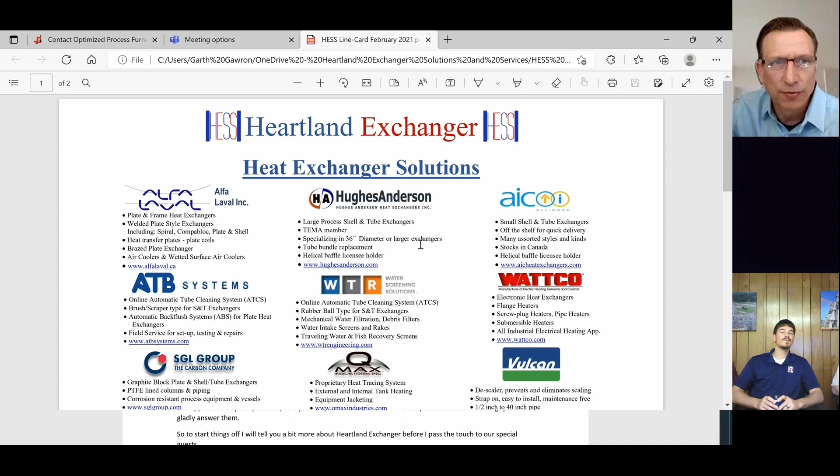These are the companies we work with as an agent rep company, to help us find solutions and services to the different applications. So how we know most of you all is with our Alfa Laval line. Alfa Laval is world known for their plate heat exchangers and their different styles of plate exchangers and their high efficiency, either in a spiral, Compabloc, plate and shell, or gasketed units.

And then for shell and tube companies, we've got Hughes Anderson out of Tulsa. Our smaller units, we use AIC out of Ontario. Wattco out of Quebec is our electronic heat exchangers. SGL Carbon out of Cleveland is our graphite exchangers. And then with heat transfer...

We're always getting into solutions to make sure we can get long run times. So we've got companies like ATB Systems that have a fabulous backwashing valve to reverse flow and keep your heat exchangers clean. WTR has a ball cleaning system that is fabulous for keeping a heat exchanger clean while it's in service - these balls are cleaning your system. Also, ATB has an online system too with brushes, so they do that reverse flowing valve with brushes, keeping a heat exchanger clean on the tube side in service with brushes or balls.

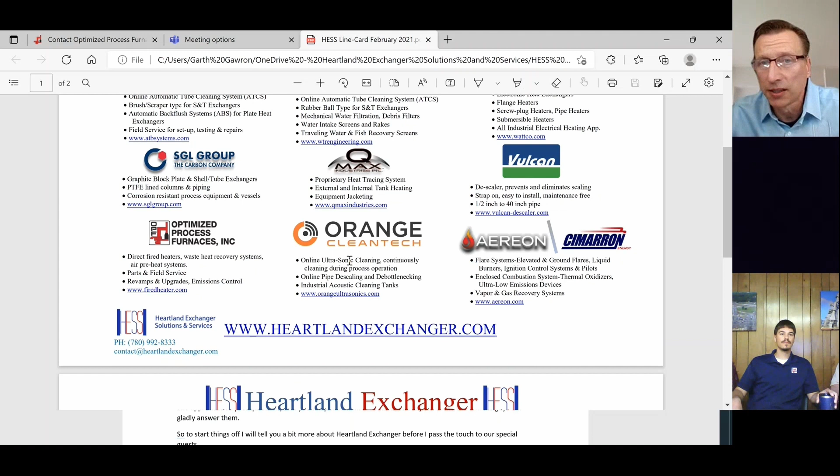We're very strong in chemical cleaning, it's one of our specialties. Orange Cleantech here is online ultrasonic cleaning, really good technology that we're bringing into Alberta. We've got a couple really good installations where we're using ultrasonics to keep your heat exchanger clean. So I think you guys understand where we're coming from - we've got a lot of good options and ideas to put in the right heat exchanger, and once the right heat exchanger's in, we're making sure it gets the longest optimal runtime.

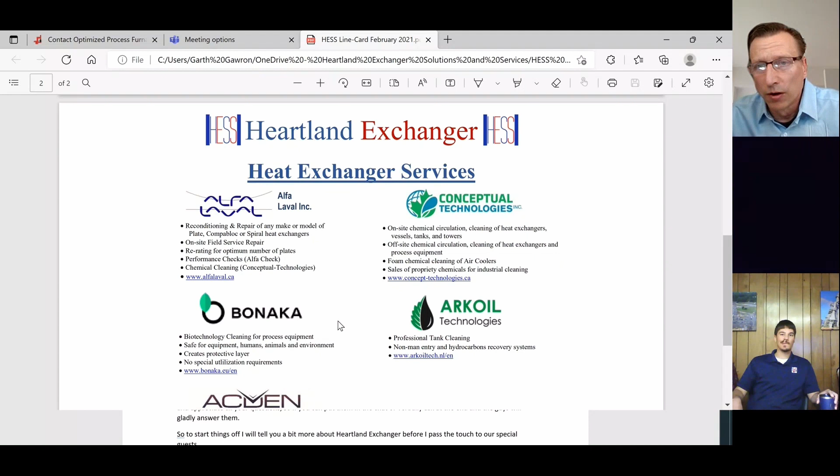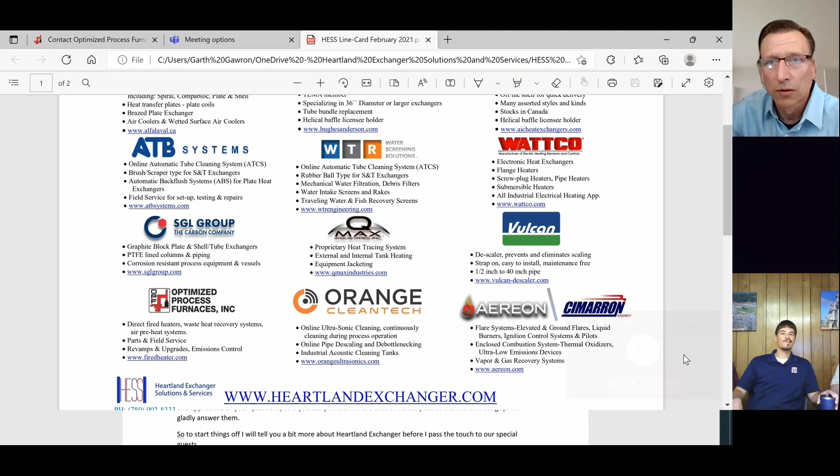And then obviously furnaces are part of the heat transfer business of the processes out here. So we were so grateful and thankful to be able to meet up with Rob Phillips and his company out of Chanute, Kansas. And so that's where we're at here today. So I'm going to stop sharing here now.

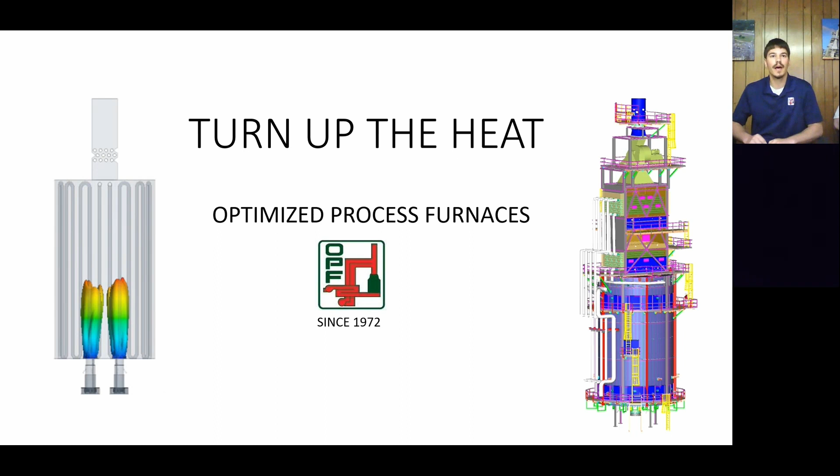We're going to start off here with our direct fired process heaters, the most broad terminology for these. We're going to blow through a couple quick applications between refineries and gas plants, talk about some heater arrangements, cover both process design, and let John talk about mechanical design and fabrication. There's a lot of back and forth on API 560, which is the standard for fired heaters, so we'll very briefly discuss that.

In the midstream gas plant area, we also offer midstream style package heaters. And last but not least, waste heat recovery units, which we've had a lot of activity with up in your area here the past year or two especially.

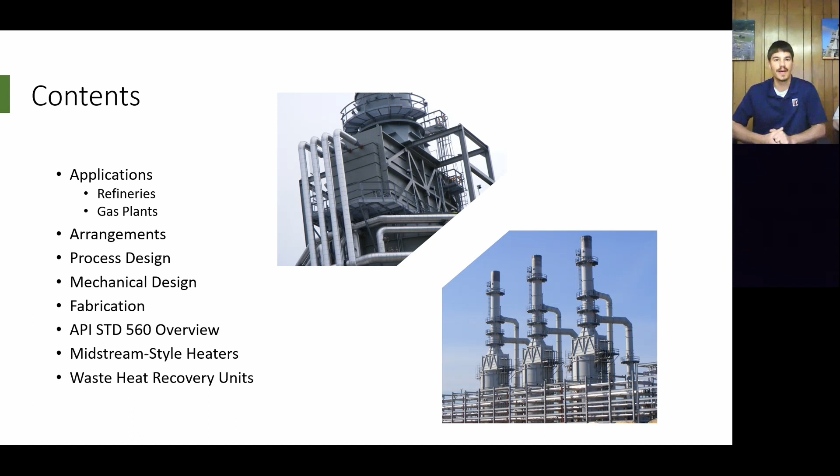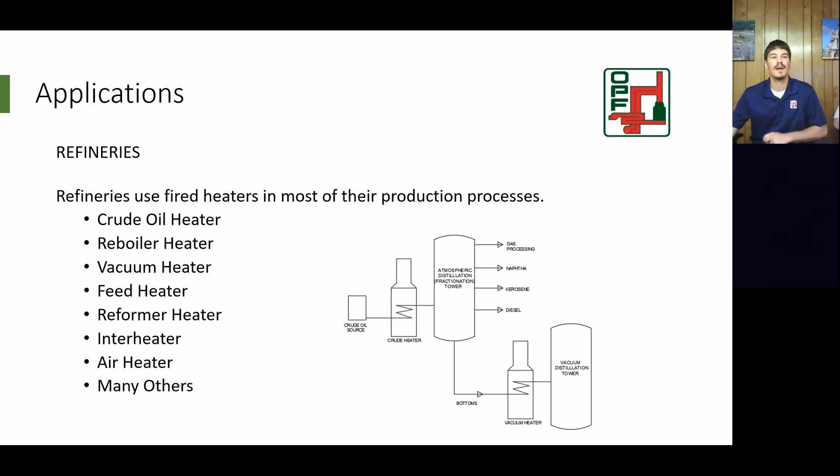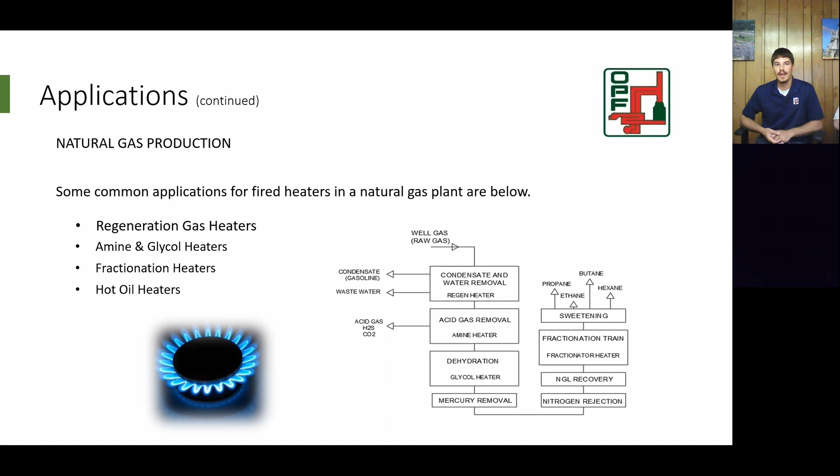As I'm talking, John and Sam may chime in too, so you don't have to listen to my monotone voice. As Eric said before, our core business starting out was direct fired heaters. We'll emphasize towards the end here, we have a lot of application for waste heat recovery units, and we'd like to have an opportunity to look at any heat transfer opportunity related to a process. We're seeing a lot more these days projects where people are trying to capture that waste heat instead of letting it go to the atmosphere and be lost, trying to improve efficiencies a little bit, especially off turbines and things like that, putting a waste heat recovery unit on the back end to capture that exhaust gas and then preheat either a process fluid or a hot oil.

So on the fired heaters, there's several different arrangements. As a lot of you know, the heat source is the burners, and there's a lot of different layouts for the burners. The most common is just having floor mounted vertical firing burners. You see on the left with the coil on the outside of the flame, and then endwall fired burners, so you're firing on the ends, and then sidewall fire. These are pretty self-explanatory terms here, but the pictures are good representations of the arrangements.

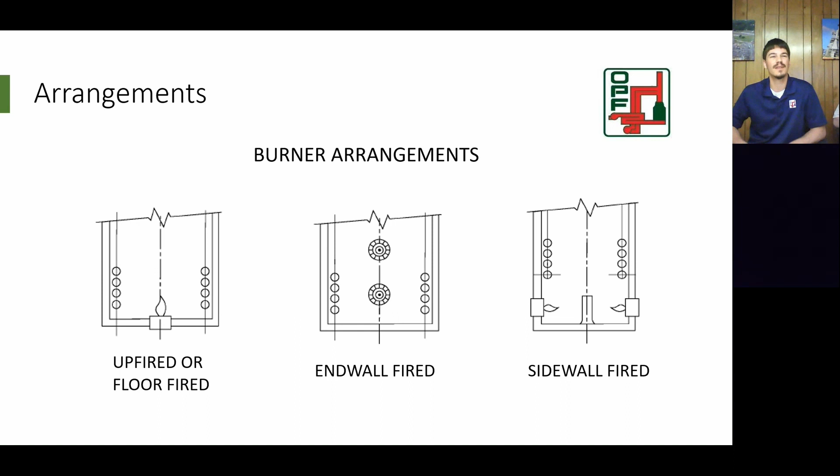Then for just the heater coil, there's vertical cylindrical heaters where you have the serpentine coil that you see there. There's helical wound coils, and then there's also serpentine horizontal coils you see in the lower right hand. And on some processes, they require arbor coil, which is a U-shaped coil, a lot of passes, and there's a large manifold that ties all of the passes together.

You usually see those with large process requirements, extremely high flow rates, very low pressure drops, high temperature requirements. And that's one of the things I think that Eric and Sam focus on a lot, is working with you when you have heat transfer needs, trying to determine what's the most economical arrangement for you that fits your process, and also what's the most economical in terms of cost and site footprint. We like to give you multiple options and work through those during the inquiry stage to make sure that you're getting a piece of equipment that is going to meet all of your needs for an extended period of time.

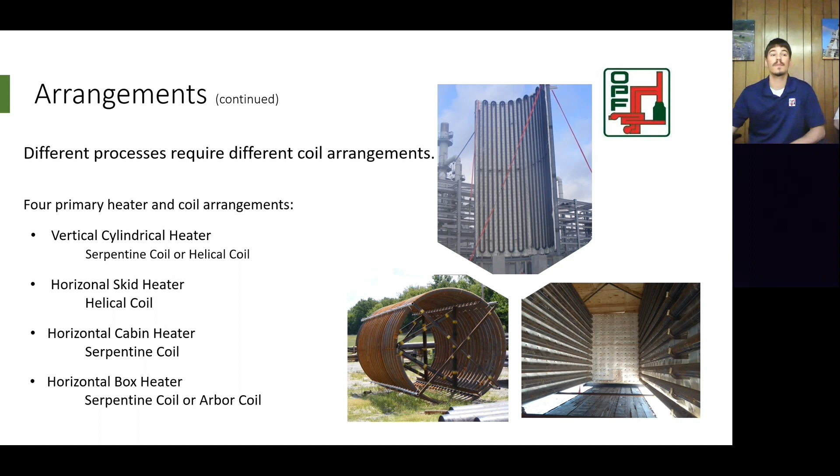I'll let Sam chime in here especially, but there are some things to consider with your arrangements. As John said, some types of heaters or arrangements are more economical than others. Some processes require or lean towards a typical arrangement of both the burners and the coil. And then, as John mentioned, the footprint of the heaters varies with what type of heater we're looking at.

And that choice really is highly situational. It really depends on your plot space availability, the ambient temperatures, ambient pressures, the process itself that you're trying to work with, the temperatures you're working with, everything that's involved there can change what you really want to try and cram that into. And what's going to give you, we like to think that we're pretty good at getting you the best bang for the buck, and sometimes that'll change.

Now, there are a lot of processes that don't really care what they get crammed into. A hot oil heater, a regen gas heater, for the most part, you can put it in a VC, a vertical cylindrical, you can put it in a horizontal cabin, you can put it in a box heater, or just about anything else, really. But some of the things that really do help think about what you're trying to do with a heater...

With a VC, the nice thing about those is that they're inherently symmetrical. So it's perfect circles, so your heat's radiated again in a perfect circle, and you can match burners to pass configurations, and that makes it easy to maintain even heat across the entire surface. And it also means that you've just got that simple can, a convection box maybe on top, and a tall stack.

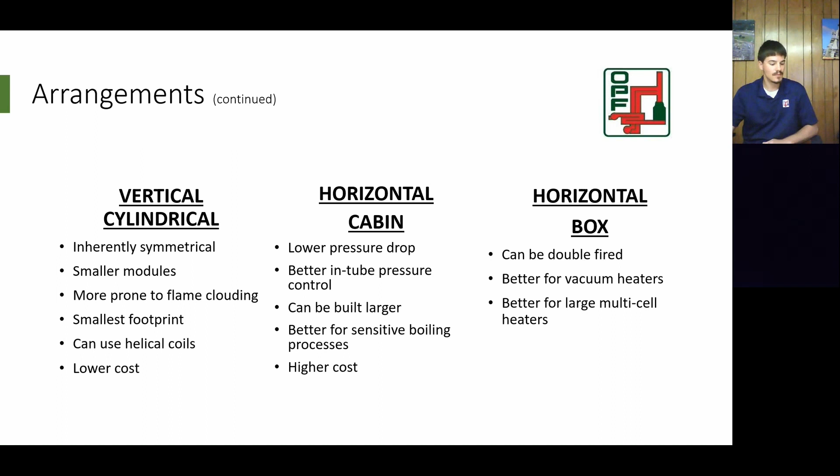And you've got your box heaters that are much better at hanging a center set of coils with burners on either side. That lets you really lower the peak flux rates and lets you keep your process from overheating, which is important. You don't want it breaking down when it's not supposed to.

Our go-to design often will be just a VC to start with. It's the most common heater you get. It's a little less expensive, easy to work with and design, and it fits most of the applications you're going to want to work with.

We see a lot of VC heaters in reformers, hot oil heaters, and NHT feed heaters. Once you start working with vacuum heaters, we tend to want a box or cabin where you can control the precise pressure drop by elevation as you move up or down the sidewalls. Crude heaters and reboilers, you see a lot of those in cabins.

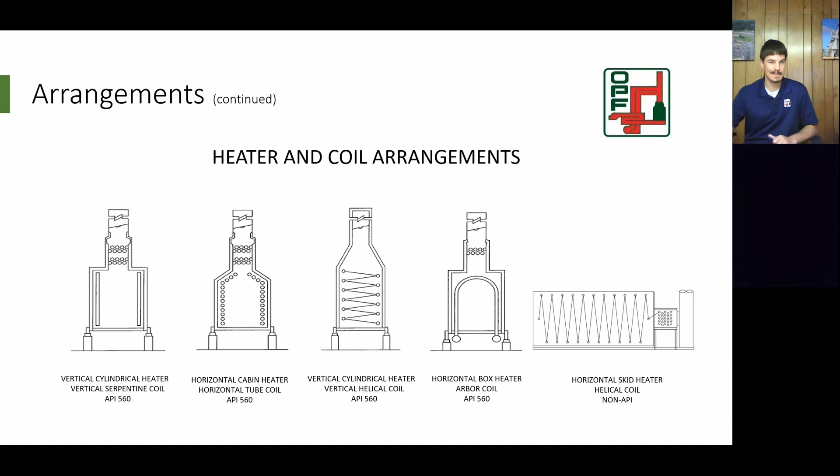As you get very large duty requirements, we've built everywhere from less than 1 million BTU heaters—we kind of chuckle about making hot water heaters—up to several hundred million BTU. Box heaters are really good because you can put multiple cells together to get several hundred million BTU, and you have much better control of your combustion and your process.

Let's see here. Is that other stuff going to pop up? No, you should click on it and it'll pop up. Okay, sorry about that.

So the different components—it's kind of hard to depict it all in one slide because of the different heater arrangements—but here we're talking about a vertical cylindrical VC heater with floor fired burners. The burners are providing the heat for the process. They radiate the heat, and the tubes are vertical around the circumference of the heater.

The flue gas flows up into the convection section where there's bare tubes for the bottom 2 or 3 rows, absorbing some of that radiant heat, then switching to convective heat transfer. Above the shock tubes, there's fin tubes—that is purely convective heat transfer.

The process typically enters at the top of the convection section and exits the radiant section, so it's a counter-current flow for heat transfer.

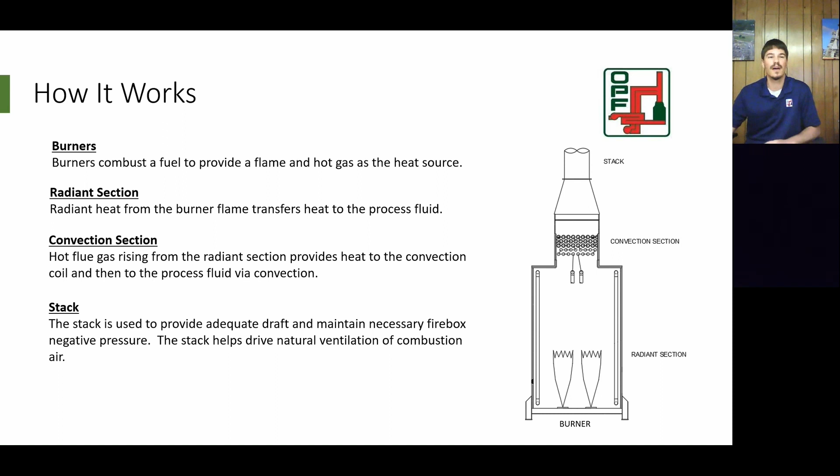Another way to differentiate between different processes for overall heater design is forced draft versus natural draft. Historically, probably most have been just natural draft, where you have a large stack on top which provides that natural draft to make up the pressure drop across the convection bank, and maintains negative pressure in the firebox so the burners are able to operate natural draft.

Lately there's been a lot of interest in forced draft. With forced draft, you don't need as tall a stack because all of the air side pressure is provided by usually a grade-mounted fan pushing air to the burners. At the same time, we typically design the stack to still maintain a negative pressure in the firebox, but all the air going to the burner is pushed by a fan.

With small packaged heaters, you'll see some positive pressure applications. Usually we try to maintain a negative pressure in the entire heater so you don't have hot gases escaping, but it's not absolutely necessary. When you're really trying to get a simple economical unit, we'll move over to a packaged forced draft unit with a little positive pressure, usually about half an inch.

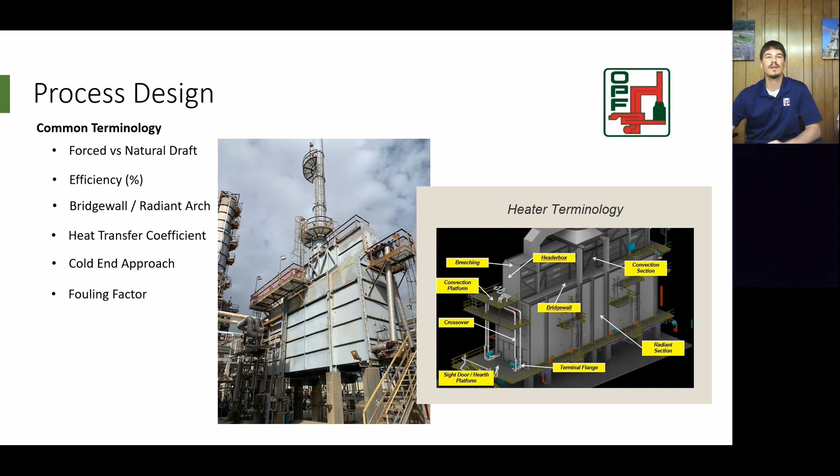I get in trouble because I forget how many clicks there are.

So we've talked about the burner firing rate, that's the heat release. Lately for emissions, the floor firing density is a hot topic. So the burner floor, where the burners are mounted, you divide the total heat firing rate by the floor area to get your volumetric heat release, or your floor firing density. Lately, burner vendors have been pushing for more area on the floor just to help with the natural flue gas recirculation coming down the walls and then towards the burners. That helps reduce the NOx generation with that mixing. So floor firing density is definitely something we're looking at on current heaters. API 560 requirements have bumped up that area requirement as well.

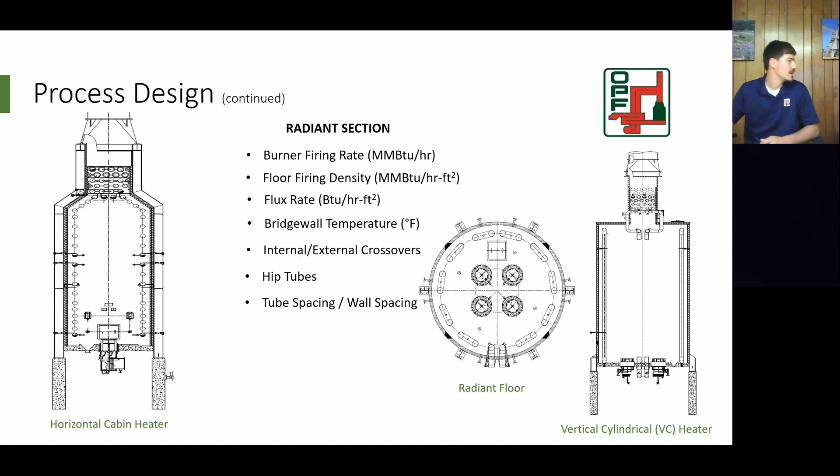I was just going to say, I think especially with ultra low NOx applications, as Eric stated, the burner manufacturers like to see good mixing. And with that recirculation down the back wall, that's one of the things they're really trying to focus on.

And then for the convection section, some common terminology here. We talked about cold end approach, and countercurrent flow. So the flue gas is flowing up vertically through the convection section, and the process inlet is at the top of the convection, flowing down for that countercurrent flow. The effective tube length is just the tube length inside of the convection section. On fired heaters, the convection tubes penetrate through the end tube sheets, and that's where the return bends are welded on. So some of the pipe length sticks out, but the effective tube length is the area of the tubes inside the convection section absorbing all that heat transfer.

Corbels are on the sidewalls, so another thing to talk about, the tubes in the convection section, the rows in the convection section are staggered, so they're offset each row to help the flue gas properly flow up through the convection section and avoid channeling. The corbels are there because with a staggered configuration for your tubes, you don't want these open areas on the side where the tubes are offset to channel anything, and then the corbels just block the flue gas flow.

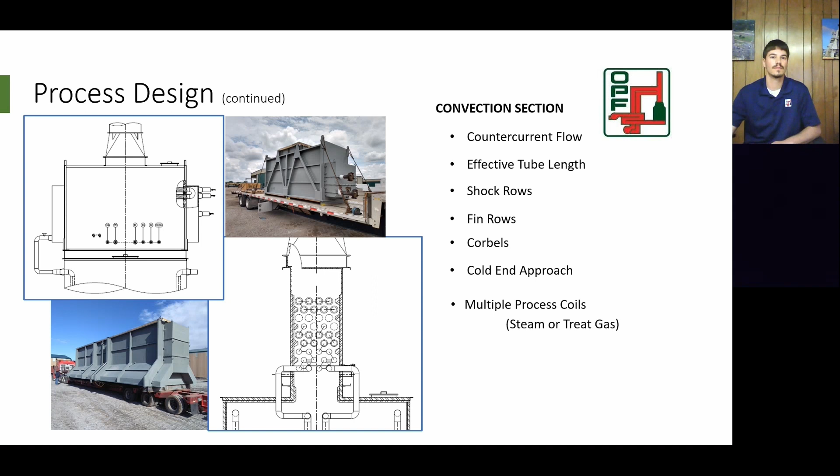As John talked about there, and as this picture shows, there's a main process at the bottom of the convection section, but we also have the capability of putting in an extra row or two if your plant needs some steam generation or boiler feed water through there, or treated gas. Small processes like that you just need to pick up, usually not a lot of heat, 1 to 5 million at most. Usually you want to keep it as a smaller function of how much total heat you're getting, because you want to be able to actually nail the process that you're targeting. We can do multiple processes up there, steam generation, boiler feed water, treat gas, and interlace if we need to, but we always want to make sure you've got enough heat to get you where you want to be.

So on specifically the process design, I'll briefly go over that. When we receive inquiry from you guys, especially for a two-phase or a vaporizing process, there's some things we really need, and one of those is a vaporizing grid, whether it's D86 curves or TBP curves.

This link here, hopefully if I open it... never mind, I'm not sure it's actually going to open with this software. With that, that's okay.

We just need, like we show here, some properties. Usually we need some physical property grids that show the property curves, whether it be conductivity, enthalpy, densities, and then the vaporization from the process inlet to outlet.

And then on the right, the data sheets that we provide with every single quote, they'll show your flux rate in the radiant section, and then the pressure drop. Probably should have talked about the fouling factor as well.

It's worth mentioning these data sheets are on API 560, and when you're not sure what you need to give us when specifying a heater, really filling out this front page and maybe the next page, the first 2 to 3 pages, as much as you can. The first page is really the most important. If you can give us how much duty you need and a little bit about what's going into it, we can figure out the rest, and we can talk you through whatever else you need to do.

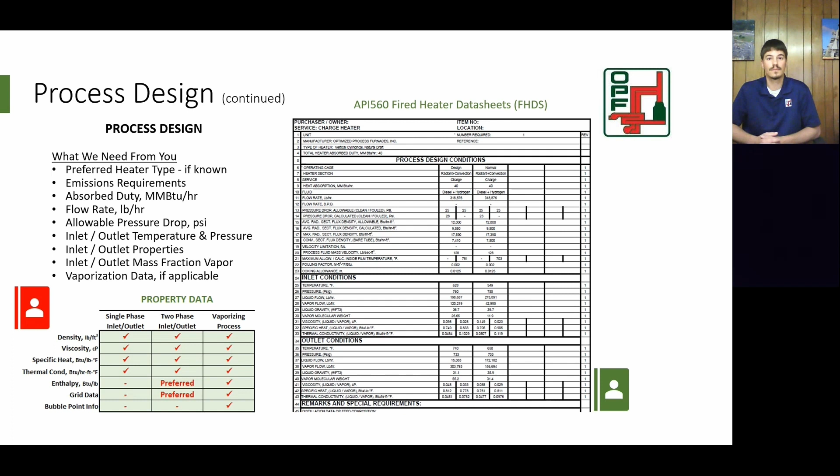We're going to talk a little bit now in this section. We'll be brief here, talking about normal operation overview, specifically first about furnace efficiency. Sam has a few slides here. Once we've gone through those, we'll talk a little bit about adjustments that can be made to your fired heater to improve efficiency, reduce your fuel consumption, those types of things, and then finally talk a little bit about some emissions considerations there. So I'll turn it over to Sam here.

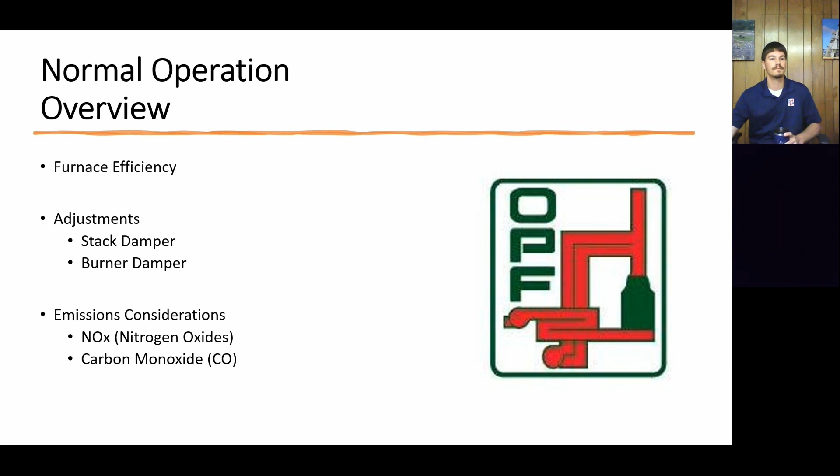And of course, you want your furnace to run well. You don't want to use any more fuel than you absolutely need to. So you find that efficiency is related to how much you're firing, how much heat you're taking up. And by definition, it's how much heat's actually getting into your process. If it's not getting where you want it to go, then it's not any use to you and it's wasted heat. So as you increase some things and decrease others, then you get higher and lower efficiencies.

One of the primary things you can control once you have an established unit on site is how you handle your air control. The more air you put into your furnace, the more air you have to heat up, the more fuel it takes to get it hot. And two-thirds of your heat is taken up, ballpark, in the radiant section. Heat transfer is a 4th order relationship to temperature, so the hotter it is, every degree matters. The hotter you can get it, the better you're going to transfer your heat in that radiant section.

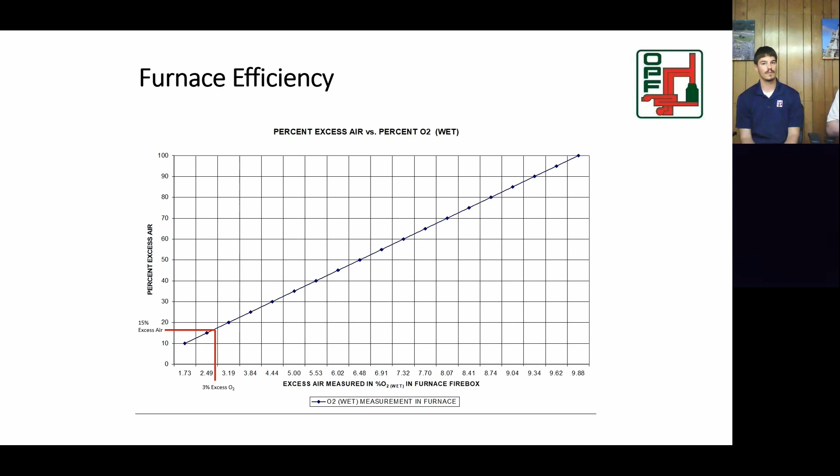The relationship here is more about thermal efficiency, as Sam stated, the more air you're heating that's going out the top of the stack and not being consumed by your process, the less efficient your heater is.

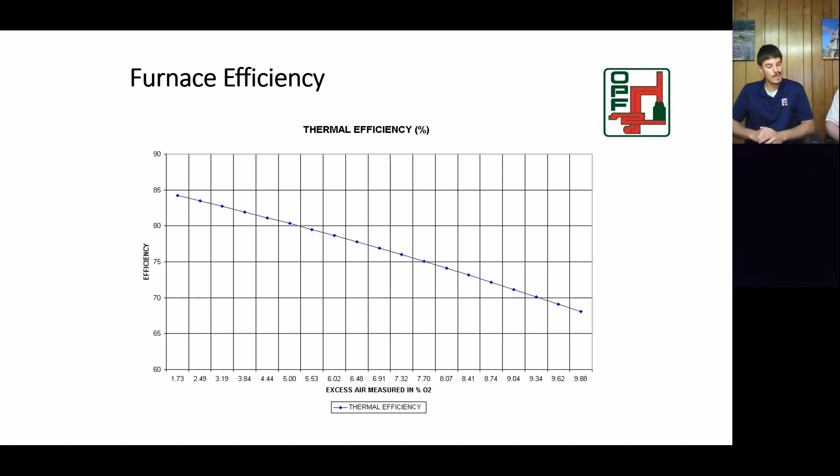So what you find is that if you've got an oxygen analyzer on your stack, just a few extra percent of oxygen in your stack can readily knock off a couple of percent of efficiency as well. That's all heat you're not keeping in your process. Fuel you have to burn, fuel you have to handle, and if you're buying it, it's all dollars.

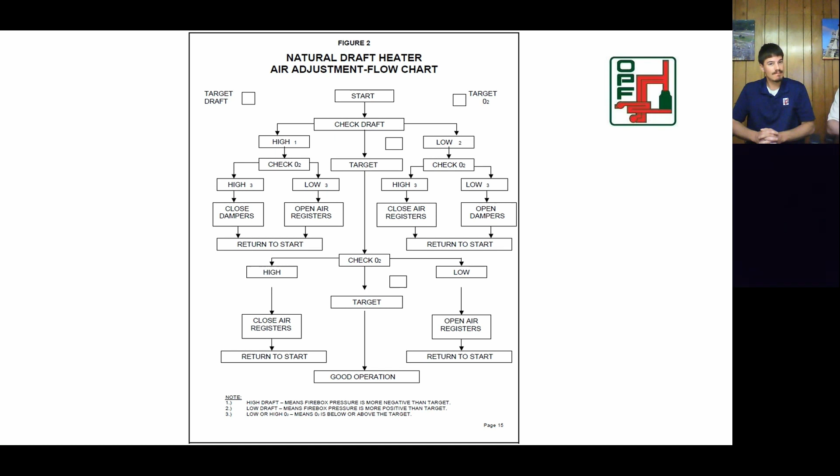So we're just looking here at a flow chart for how to adjust a natural draft heater. It really boils down to you want to lead with turning down your fuel or turning up your air. Being safe, you always want to have less fuel than air — you never want to get to a point where you have too much fuel in a firebox and not enough air to burn it. So if you're having trouble with a furnace, you turn down the fuel, let it stabilize, and you follow this flow chart, checking your oxygen and making an adjustment as you go.

You'll also note that as you get too much oxygen in, your flames will change color. It depends on exactly what's in your fuel, but with natural gas, generally you want a yellow flame. If you've got too much air, you're going to see some blue flame, a lot like a Bunsen burner.

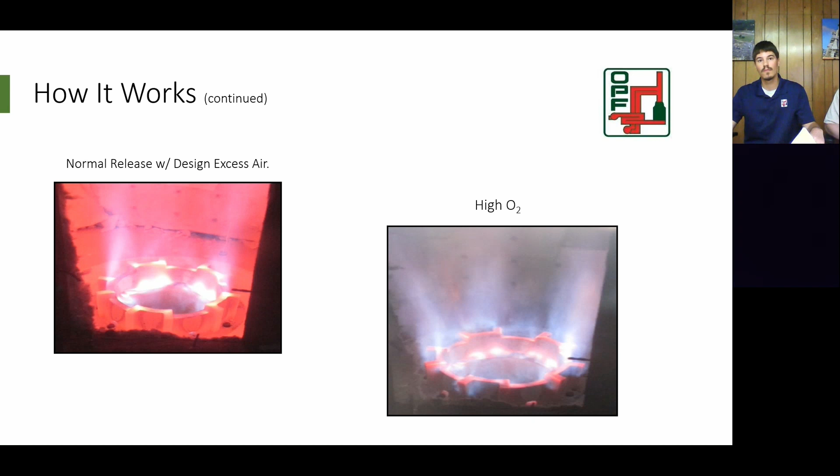Moving on to the most important part, which I think is the mechanical design. I'm sure Sam and Eric will disagree, but we talked a little bit primarily on the mechanical side. We're concerned with these primary factors here.

One is the design temperature and pressure, which meets your requirements in the field, which in turn dictate what our tube wall thickness is, depending on the specification we're using. Typically ASME or API are the two primary governing design codes we use for determining wall thicknesses.

Additionally, when we move more into the mechanical side, we'll look at stack design. Typically for most direct fired heaters, and even some waste heat recovery units, we'll have a self-supported stack. Our structural engineers look at stack vibration, the tube support system associated with the heater, and the insulation system. We work with the process group to determine the best type of internal insulation required for the job. We're also looking at access in terms of ladders and platforms to get to your instruments and controls attached to the heater.

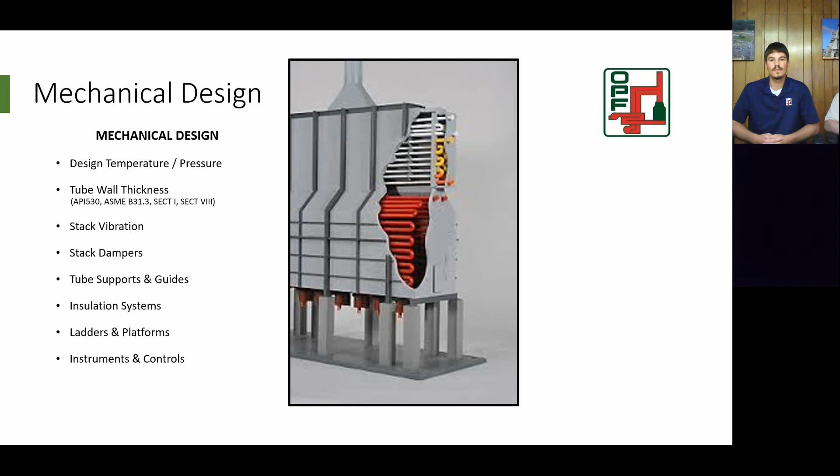So those are just a few of the things mechanically that we look at throughout the life of the project. And here on the mechanical side, we just talked briefly about the design temperatures and pressures and the tube wall thickness.

Many of you probably know Barlow's formula. That's the primary formula used by ASME and API to calculate tube wall thicknesses based on the allowable stresses at whatever your design temperature and pressures are. We can back into a required tube wall thickness, whether that's a standard wall, Schedule 40, or a heavier wall, depending on your process application.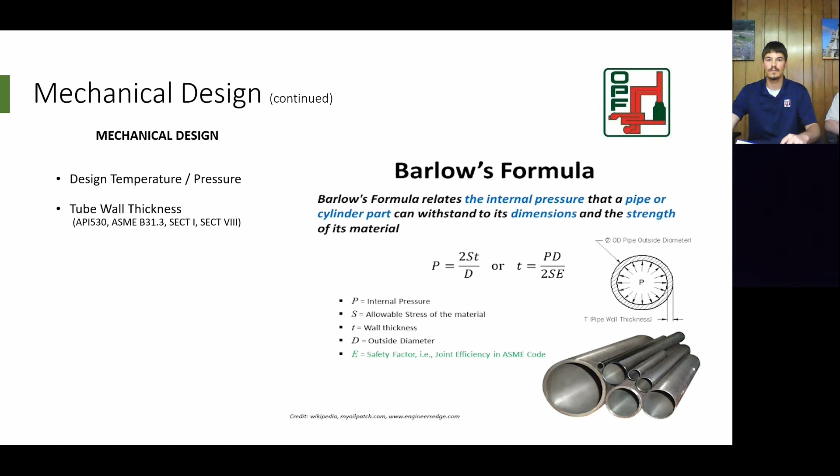Again, looking at the stack, that's one of the main focuses. The last thing you want at your facility is a stack that's moving in the wind. It gives you an uncomfortable feeling that something bad is potentially about to happen. The last thing you want is a customer walking in the door saying, hey, I just saw your stack moving out front. So typically for any application in Canada, we'll utilize the Canadian Building Code.

We can also use ASCE 7. The most current code right now, I believe, is 716. In conjunction with that, ASME also has a steel stack design recommendation called STS-1.

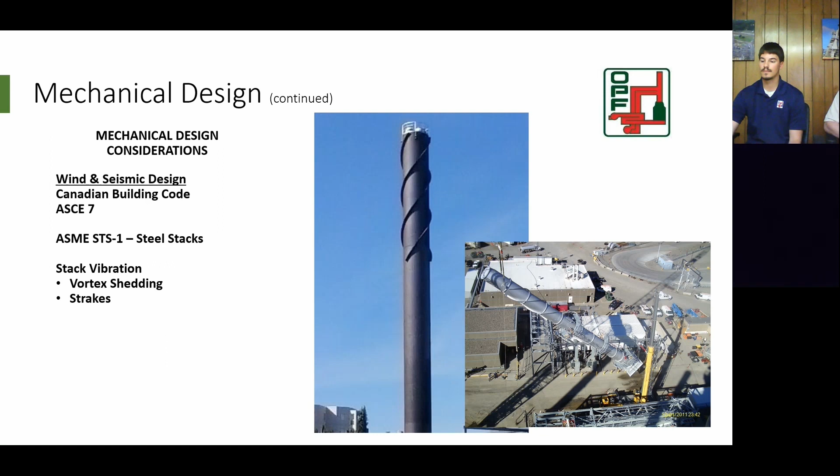So we use that as well to design the stacks, making sure we don't have any vortex shedding issues, which typically involves strakes attached to the top of the stack. Many of you, in your facilities or as you drive by them, may notice these spiral wound strakes around the top of flares or unsupported stacks that help reduce the effects of vortex shedding.

As Sam stated before, with the flow chart we have for determining good efficiency for your heater, if we're adjusting pressure inside the stack or airflow, the two primary tools at our disposal are stack dampers and burner air registers. The stack damper is predominantly used to adjust pressure inside the heater, and the air registers on the burners are used to adjust oxygen.

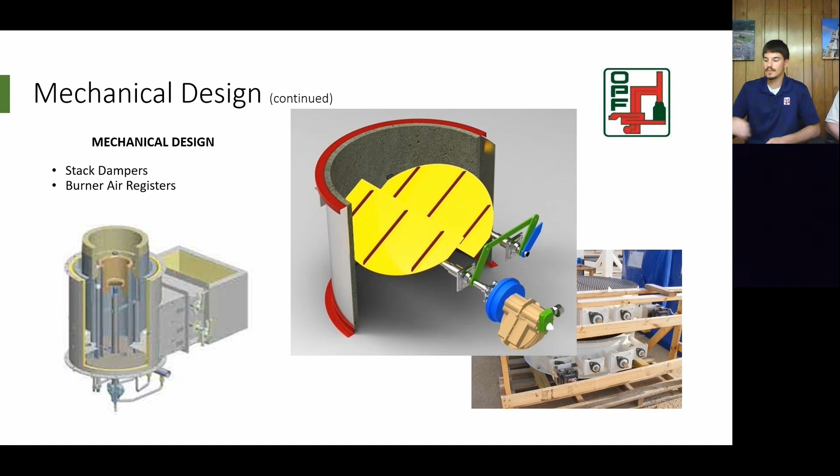Mechanically, I'm going to turn this back over to Sam and let him talk a little bit about supports.

As we design these furnaces, one of the things we try to do to save you money is account for particular stress points where individual tubes have tension or compression, requiring additional hangers. So we design around those values.

API has specific requirements, ASME has specific requirements, and the Canadian building codes and requirements are very similar, often just referencing ASME. So that's one of the things you'll find as we limit various sizes. We try not to go taller or wider or longer than needed to accommodate those, but we can build them however big we need to.

Tubes generally, horizontal tubes such as the convection section or horizontal cabin heaters — I'm sure many of you are familiar with the general rule of 35 ODs for unsupported pipe length. For vertical tubes, I think API limits it to 70 foot straight tube length; it used to be 60. I believe they also have an unsupported length for vertical tubes, but OPF uses our own internal calculations for those stresses on vertical tube supports.

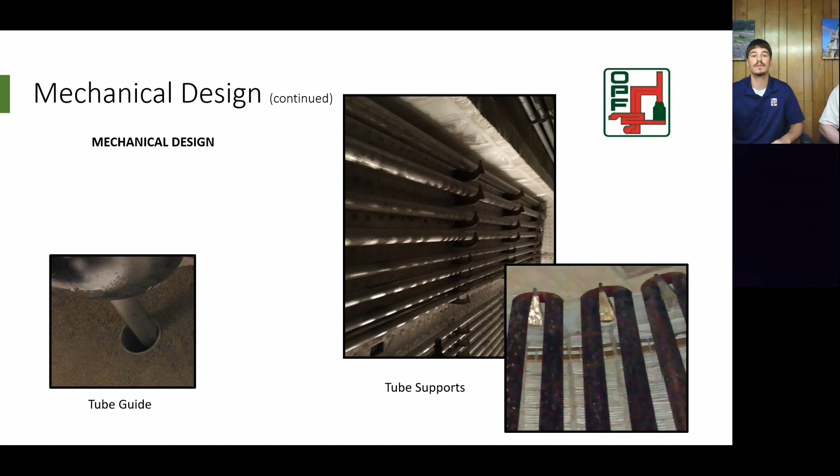All of our heaters are internally lined. John may talk about that in a minute as well, but API 560 specifies an external casing temperature of 180 degrees Fahrenheit. So typically the radiant section is insulated with ceramic fiber blanket, convection section as well.

Occasionally we come across some customers who want insulating castable refractory, at least in the convection section. It's more common if anyone up there is firing oil, and if they have soot blowers in the convection section, you

want castable to avoid the soot blowers knocking off the insulation. The radiant floor and around the burners is typically 6 to 8 or 10 inches of castable refractory, and then there's also a layer of fire brick to protect from the extreme temperatures down there around the burners.

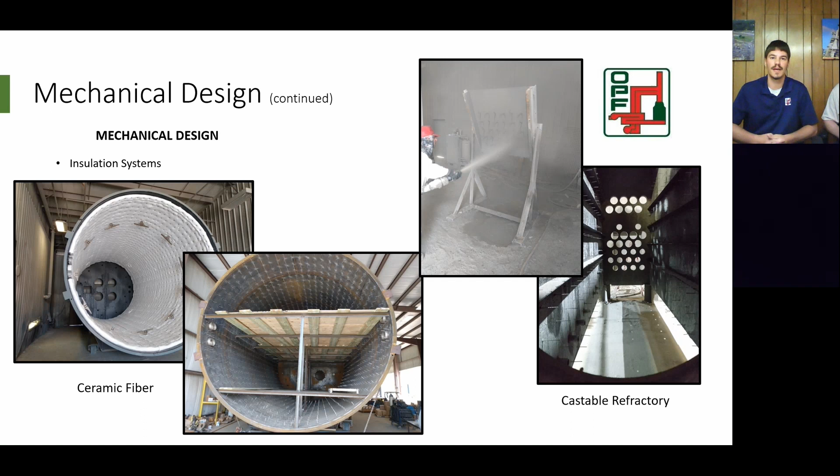It's a good segue into our next slide here, talking specifically about burners. Again, there's been a real focus on ultra low NOx or low NOx burners, and the burner manufacturers have gotten very good at designing these burners. Some typical things here that many of you may know.

We've got fuel gas piping going to each burner. We typically have a sight port on the burners, as well as an air control handle, which will allow you to adjust the opening for combustion air being pulled into the heater with the stack effect there. For the most part, a lot of these designs are very similar, but again, that's the main thing.

Again, it gets very congested mechanically underneath the heater with all of the piping and access viewports that are necessary. So from a mechanical design perspective, that's always something we're aware of, and we tend to work with the end user to make sure that we're meeting all of their requirements.

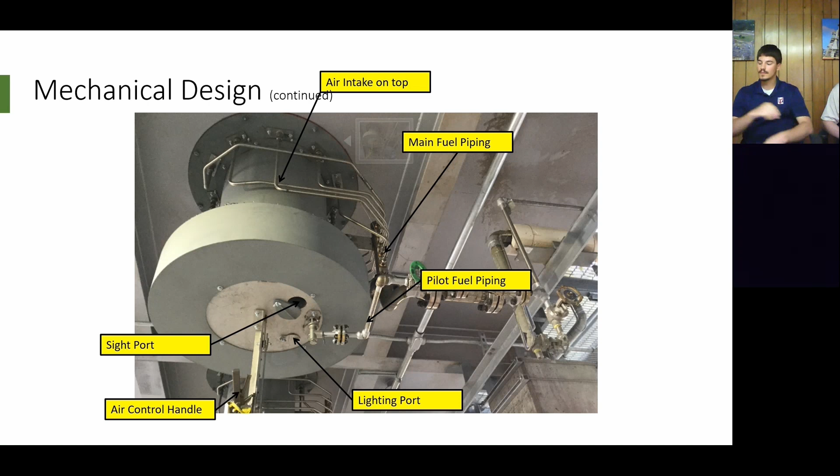So accessories of the heaters — it's real common over in Europe. There's a lot of heaters that we've retrofitted with air preheat. It doesn't seem as common, but sometimes there are still units, large units, where our customers want us to design an air preheat system to go with it. So I'll let Sam briefly go over that and the benefits of air preheat systems.

Well, the way air preheaters work is, of course, all your extra heat that you can't pick up — we talked about how a hot process will keep you from being able to get your efficiency while the rest of the heat goes out in your stack. The way that the furnace works, of course, is it heats air up, and all of that air radiates heat or has a convective heat transfer coefficient it uses to pass through fin rows, etc. That's where you get your heat from.

So you use fuel, and your efficiency is based on how much fuel you have to burn. So what we do is after that stack, all that hot flue gas hits the stack, then you'll use some sort of recuperative or regenerative heat transfer to heat up the incoming combustion air. So it gets really hot, a couple hundred degrees, and now you can target 90–91% efficiency, which is awful handy. It's the biggest drawback, honestly.

You've got footprint considerations. There's a significant amount of equipment involved. You can see balanced draft, induced draft fans, forced draft fans. And the cost is such that you generally don't see these on anything much smaller than like a 30 megawatt heater.

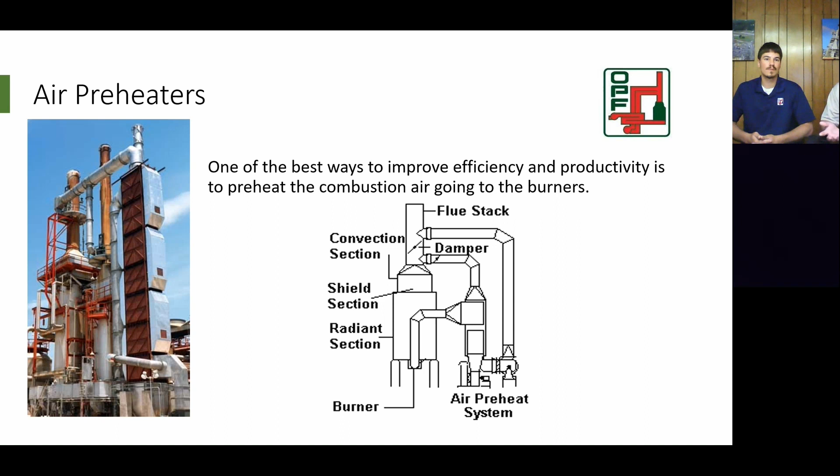Another thing with emissions being a focus point in our industry is selective catalytic reduction units, SCRs.

There's been a lot of new heaters who really want these. Similar to an air preheat system, we can duct these down to grade, but we have a lot of heaters down in Texas, along the Gulf — a few behind us in these pictures here actually — where we have mounted the SCR in the convection section, which saves on your plot space and is usually a more economical way of doing it. It just means we have to mount an ID fan on top of the unit because the SCR induces a lot of pressure drop through the catalyst and injection system, but it results in a substack, and your

ID fan on top of the heater ends up providing sufficient draft to the heater firebox, keeping negative draft.

So I don't know if you have anything else to add on the technology, but when you're interlacing, the nice thing about putting your SCRs in your convection box is you get to really dial in what temperature it operates. The catalyst involved usually operates between 500 and 800 degrees Fahrenheit. Sometimes you're looking for a higher efficiency heater, it's going to be too cool at the outlet, or you're going to have a big turn down. It really helps dial in the temperatures by putting it into the convection box, and it's real handy.

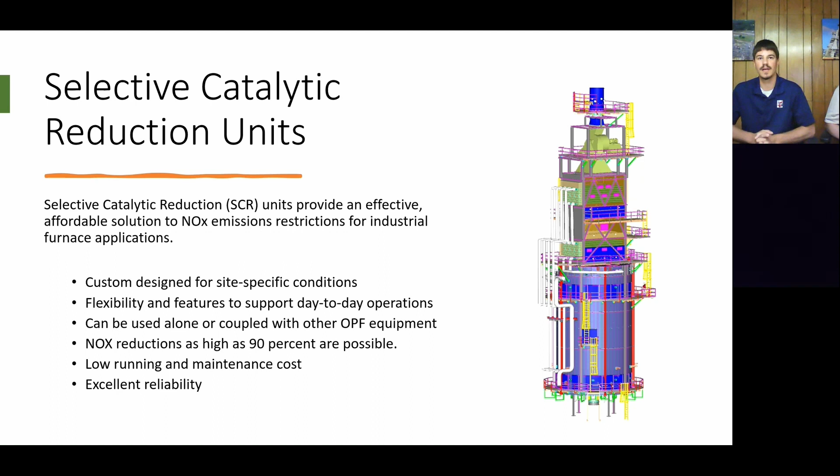Moving on to a little bit about fabrication, especially in Canada. We do have shops here in Kansas and the Oklahoma area that are CWB certified on many projects. That's important, so we have that capability here to provide CWB certified equipment on the structural side.

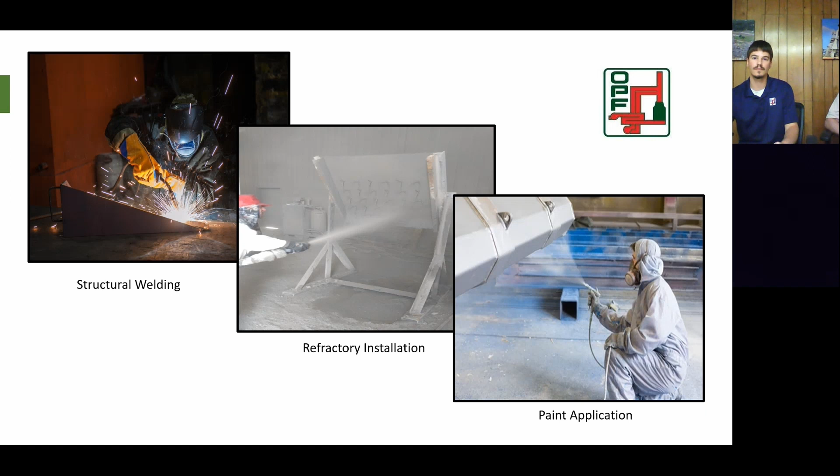On the pressure parts side, typically ASME is the standard used here for any pressure piping of that sort. As you can see here, structural welding codes are typically related to CWB or ASME AWS D1.1. Refractory installation is typically installed per API standards—API actually has a 936 standard that specifically deals with refractory installation. Paint application, of course, is always done per the manufacturer's recommendations and approved procedures prior to the start of any of that work.

Once things are done, all equipment that we send to Canada comes with a CRN number specific to the province it's located in. Depending on the customer's request, we also have the ability to provide Section 1 and Section 8 code stamps for the pressure parts.

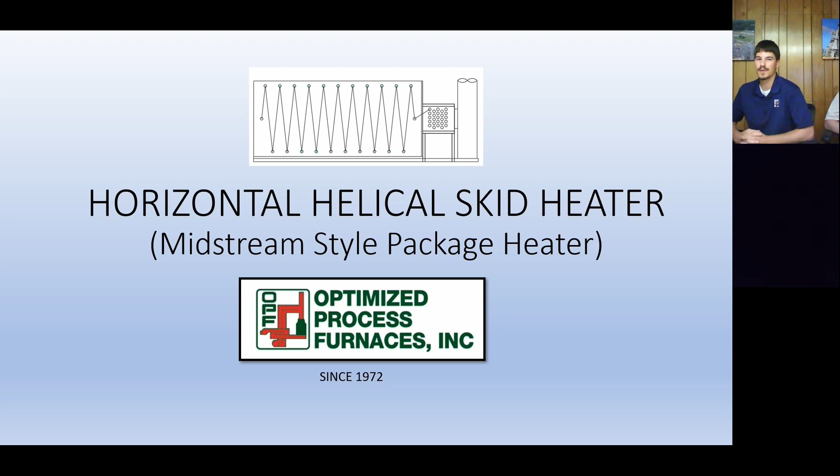So we're getting close on time here, so I just want to briefly touch on our midstream style heaters. They're pretty common down here in gas plants, West Texas, Oklahoma. They're not your typical full-blown API refinery heaters. We joke we need to come up with a better name, but around here we typically just call them horizontal helical coil skid mounted heaters.

These are good applications—they're really cost effective for an application where you're maybe not planning to have the 40 to 50 year life cycle typically seen in a refinery. It's an application where if you want 20 plus years, good applications too are what I call simple applications like hot oil heaters, regen gas heaters—things that are consistently on, or a process that's very predictable. And these are very good applications.

They're very economical for any type of heat transfer application. Again, one of our focuses is to provide you with a quality piece of equipment at the least cost.

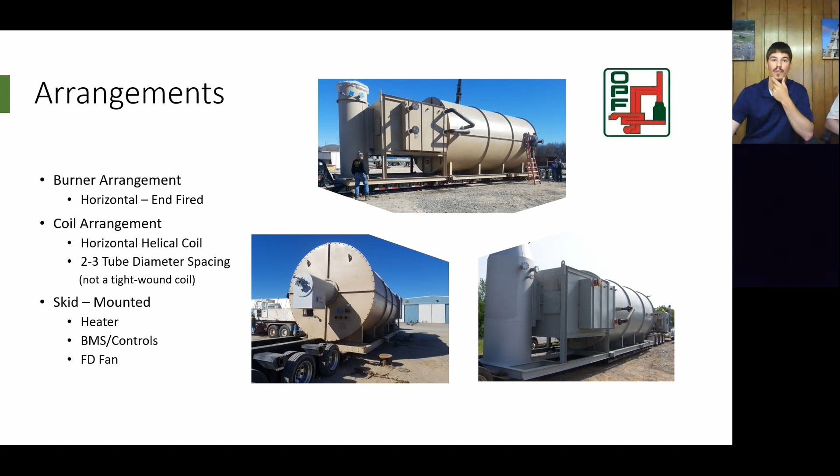These units are arranged such that they're a forced draft design. There's just a single burner mounted on the end wall, firing horizontally. We can do low NOx or ultra low NOx down in that 0.028 pound per million BTU range. We mount a forced draft fan right on the skid with the heater, and then we mount the BMS and fuel train behind the heater or even attached to the heater to minimize the footprint of the unit.

The instruments and controls is something we haven't really touched on. OPF doesn't do the instruments and controls in-house. We rely on a handful of subcontractors or sub-vendors to provide the BMS, the fuel train, the valves, and the skid for the designated fuel system. And the question did come in.

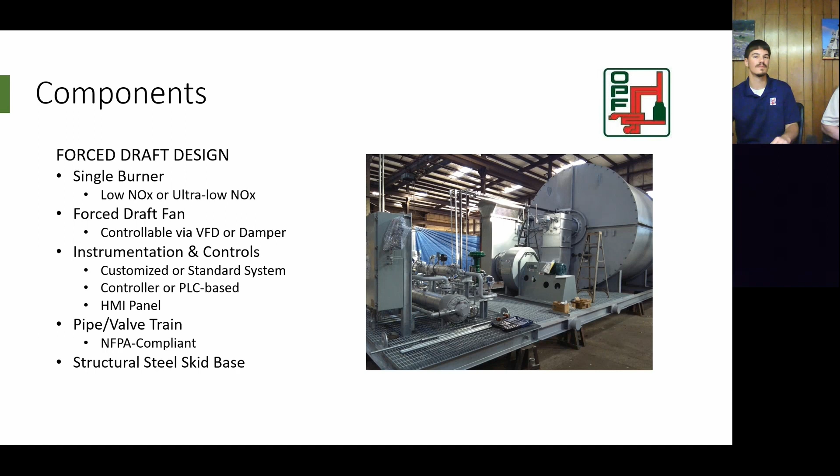B149.3 is fully accommodated. We have several vendors that we work with, and we work closely with all of our controls vendors to meet the requirements. B149.3 is the standard for Canadian applications, and we do meet all of those. Whether you need a PLC or simple controller, CRN requirements, low temperature requirements, we will meet all of those. Some of our partners on the control side are actually located in Canada, so they're very familiar with those CSA requirements.

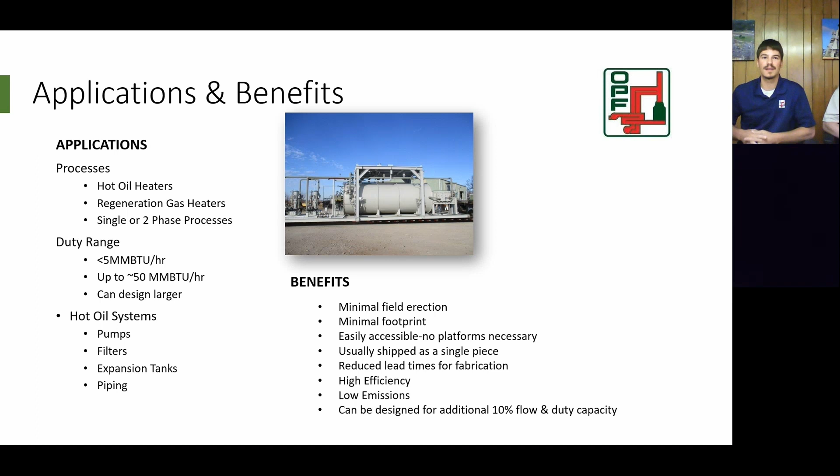So these units, as John briefly touched on, a lot of hot oil heaters, a lot of regen gas heaters, those are single phase units in the helical coil. We have used these occasionally for two-phase processes. These skid heaters, we typically see around 5 million BTU up to around 50 million BTU. Theoretically we can go bigger, but we're trying to provide a compact package heater. Anything above about 50 million BTU absorbed duty range, it gets so large a diameter that it's hard to ship as a single piece, and when you start shipping multiple pieces, your field costs start going up. So we start looking at different arrangements when we get to the larger units.

Waste heat recovery units, that's a hot topic up your way. Again, we're trying to pick up any extra heat from your system. We typically put these on the back end of turbines, compressors, diesel engines, on the exhaust stream there. There's a lot of heat there coming off, usually anywhere from 800 to probably 1200 degrees on the high end of your exhaust. So we put a horizontal flow unit through there.

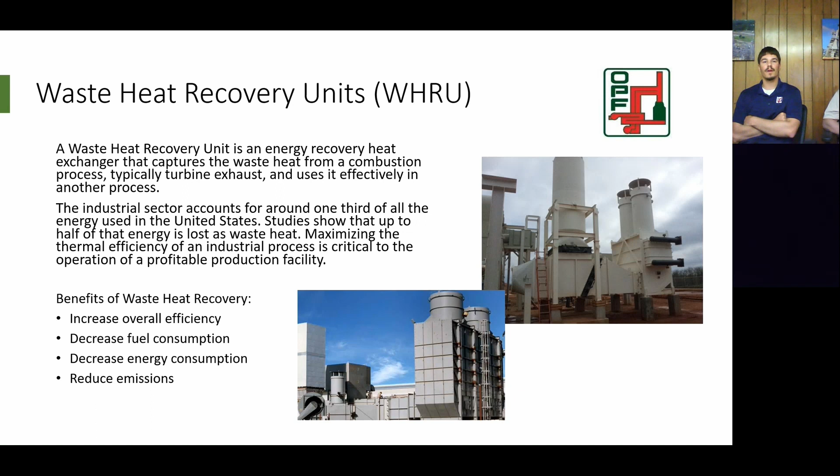It usually comes through a silencer either right off of your exhaust, or in this picture in the middle there's a diverter that you can divert the exhaust gas either vertically up the bypass stack or over to the unit, which contains the process coil. So that silencer can be either mounted downstream of the diverter as shown, or you can mount it on top of the bypass as well, depending on customer preference.

These are good applications too. In lieu of putting in direct fired heaters, if you have that waste heat stream that's essentially being lost to the environment, there's hot oil applications where you could use that exhaust to preheat that oil, as opposed to putting in a dedicated heater for your hot oil system. Most common is hot oil, but we also have glycol, a few hot water heaters on offshore platforms, and we've seen some crude as well.

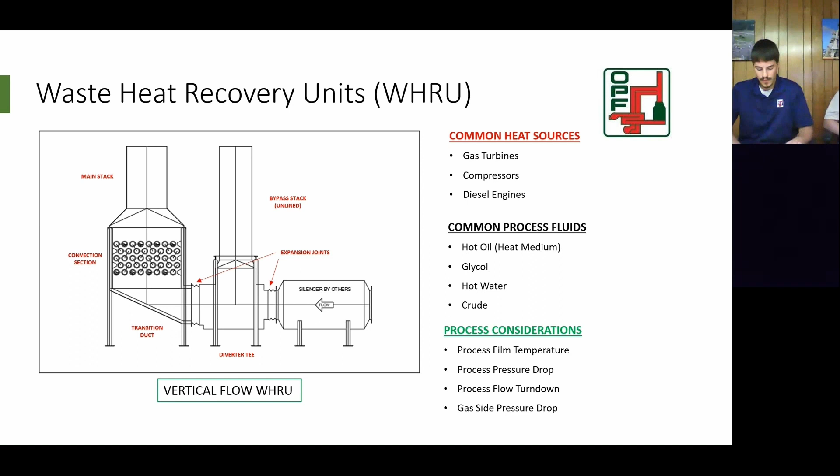There's one more slide just to show the arrangements. The previous slide was a vertical flow, but we can also maintain that horizontal flow if plot space is limited, or even if it's just not a large unit, sometimes that horizontal flow is the way to go. We can get real creative - we did some work with Phillips a few years back with a bit of a spaghetti ductwork mess getting around piping racks and between the equipment and the waste heat coil itself. So we can find a way, and we can even do these offshore. If there's a way, we'll work with you to find it.

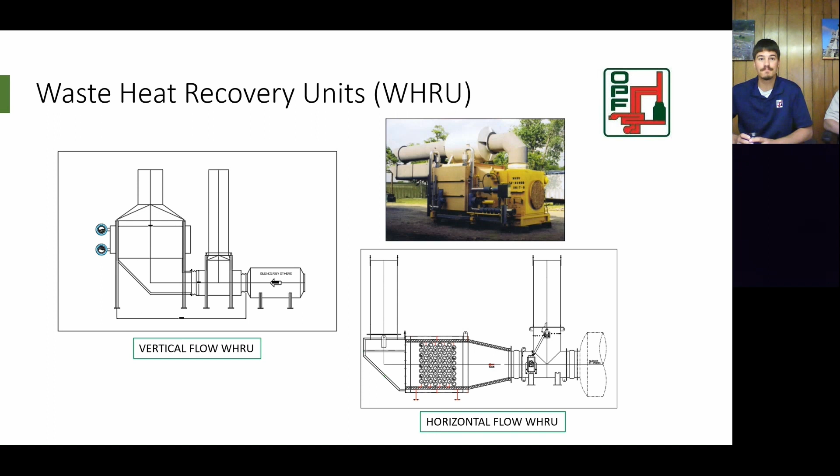So I guess we're getting close here. It looks like we overran our time frame just a little bit. We do like to talk about heaters. A few questions here - I don't know if Garth has been collecting questions towards the end of this.